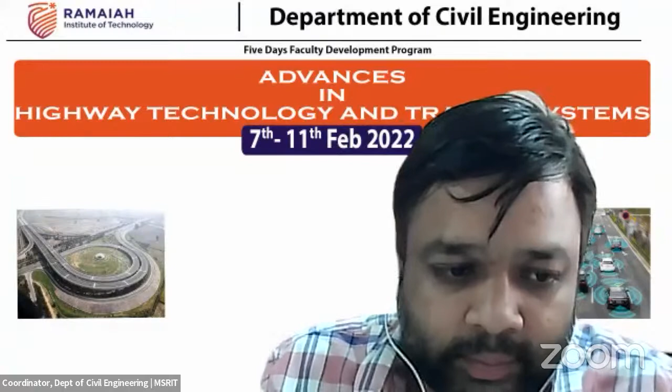Thanks, Charan. Thanks for that introduction. It was nice. I feel very proud to be an MSRIT guy. It's almost 13 years back. I studied and passed out in 2009. So it's been a long time since I've been in MSRIT. So yeah, thank you.

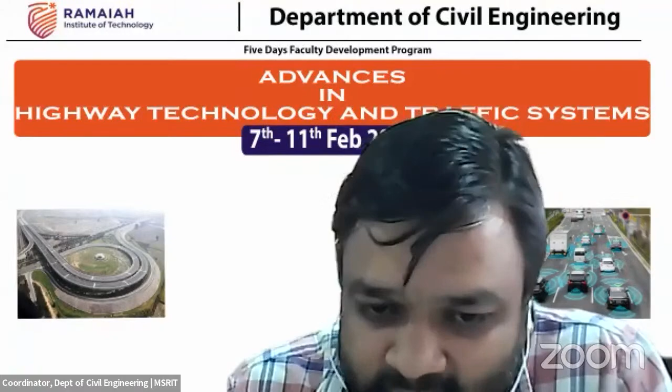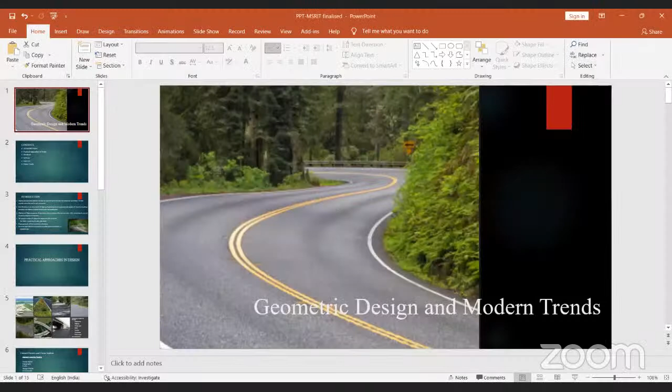So in today's topic, I'll be speaking about geometric design and the modern trends, what we are following and where we have to implement. I'll not be going into what is the transition formula or super elevation formula, because as students and lecturers, you would have learned them in your bachelor's or master's. Definitely, you'll be teaching them and learning them.

But I will be explaining the practical experience, what we have to do, what softwares we need to learn, what codes we have to refer. So you can tell the students who come out of colleges, and they can definitely face the interviews very well. So that's the main intention.

I'm also telling the future trends, what we have to foresee, what we are presently doing in current trends. These are the main points I'll be covering. So these are the contents for today's presentation: introduction, what is geometric design, practical approaches in that design, then the various standards. I'll be touching upon IRC standards because majority we are speaking about Indian companies. And other things like the various softwares.

Here I am giving emphasis on safety, because I saw there are other road safety topics in the upcoming sessions also, but what importance we have to give to safety is a major thing we have to consider. And the last, the future trends, that is most important. Nowadays the technology has grown in such a way that we have to be well versed and ready at this present stage.

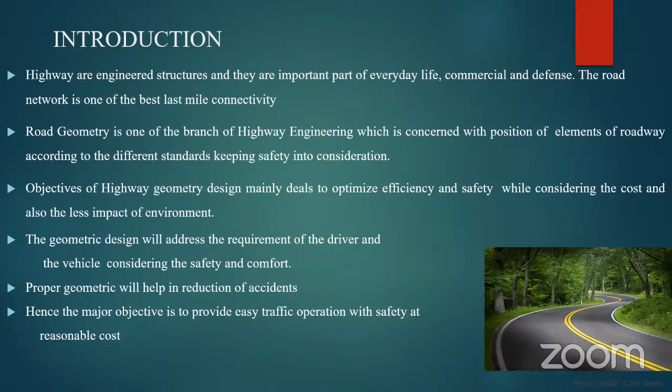If I am designing a 4-lane national highway, I'll understand, okay, this is my requirement. This is my design speed. It will have a median. What are the conditions I need to follow? So first, as an engineer, if you want to design any project, you should understand which project you're designing, because each and every road has its own standards.

So it's not that an expressway will follow the same design speed as an MDR. No, it's not like that. Each and every road has its own specifications. Each and every junction will have its own specifications. So first, as engineers, we should understand, okay, I'm designing a national highway, say a 4-lane or 6-lane national highway. What are its configurations?

Or if it's a 2-lane, what will be my lane width? And what is the median width? How should I approach near the structures? What should my slopes be? So that's what you should understand first, the classifications. If you refer to IRC, each and every road classification and its specifications are very clearly defined.

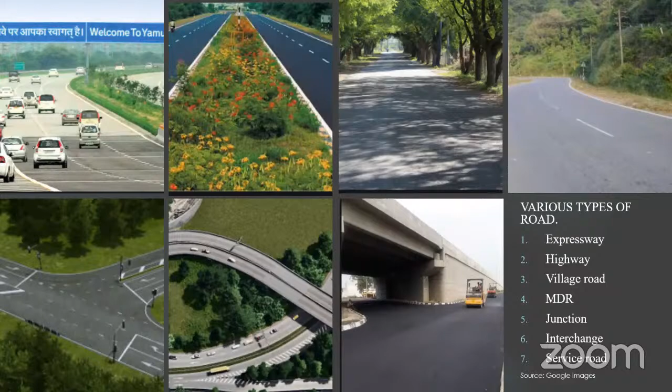So now the very important thing we should be understanding is the control factors. Design speed is one of the major control factors. If you see each and everything, your signboards, your curve design, super elevation design, everything is interlinked to this design speed. So your design speed plays a very important role in your geometric design.

So we learned about classifications. Okay, I'll be designing my 4-lane national highway. Now the control factor is your speed. I'll be designing for 100 kmph. That is your major control factor, because all your transition curve designs, which use the three formulas to calculate the maximum transition values, or the radius you're going to put, or the super elevation, everything is linked with the speed. So this is one of the major factors.

Now coming to topography. Topography, in local terms, is the ground condition. It can be a plain terrain or hilly terrain, because for a national highway, if it's a hilly terrain, I cannot design it for 100 kmph. So I should also understand my topography. If it's a plain terrain, what should I do? If it's a hilly terrain, how is my design speed interlinked? My design speed gradually reduces. How is my radius? So that is very important.

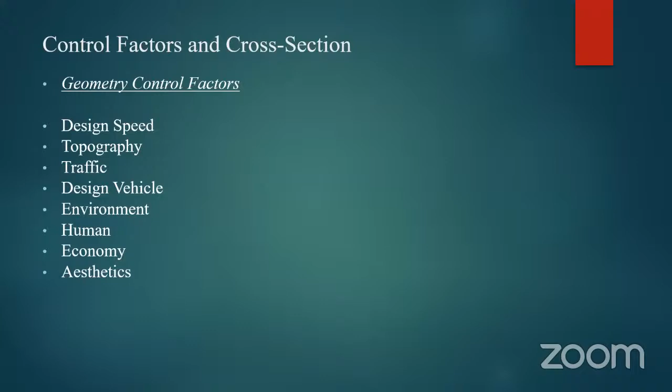And aesthetics. Aesthetics is the least thing we give weight to, but nowadays the trend is that we have to design roads which look very beautiful, with beautiful surroundings. If you see some streets in foreign countries, they look beautiful running between the buildings. Aesthetics is also given importance nowadays.

So I know my clear carriageway width is 11 meters. There is a crash barrier, a footpath, then a service road and drain. So within my right of way, I have to design this completely: my service road, my footpath, drain, and my carriageway, which should also have a footpath in the bridge location.

So my right of way is only 40 meters. Generally for a 4-lane, they'll give us a right of way of 40 meters. Within these 40 meters, I have to fit this entire component. If you take it as 16 meters, your 5.5, it's almost 11, 26, 27 meters plus 2 to 4, it's almost 30, 31 meters, plus extra side slope of 2.5. So you'll understand that within 40 meters, I have to fit these components.

So now you know my classifications, my control factors, and now I know the cross sections. Knowing all these components, each and everything, then we can go and start your designs.

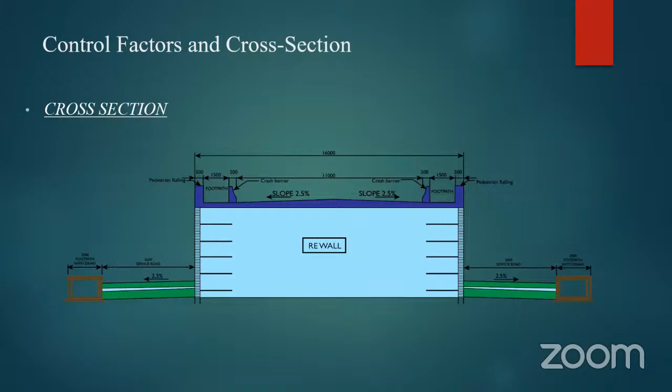So as I was mentioning earlier, alignment design is basically bifurcated into two types, horizontal design and vertical design. Horizontal design is basically made up of a tangent, a transition curve, a circular curve, then again a transition curve, and again coming back to tangent.

If a curve is designed with more than 1850 meter radius, there will not be a transition, because you don't need to provide any superelevation. The normal camber that is provided will take care of the superelevation effect. So I will not be going into the various types. There are 5 types of sight distances. You'll definitely be learning what is the stopping sight distance, intermediate sight distance, overtaking sight distance, headlight sight distance, and intersection sight distance.

So practically, why am I telling you about sight distances? Now I'm designing my 4-lane divided carriageway. I will not be concentrating on my overtaking sight distance, because overtaking sight distance will not come into picture if I'm designing a 4-lane divided carriageway, because your traffic has been bifurcated by a median. So as an engineer, we should not think, whether I designed the alignment, I have to check with OSD. No, if I design it with my ISD or SSD conditions, that is more than enough. That's how we make the job very simple.

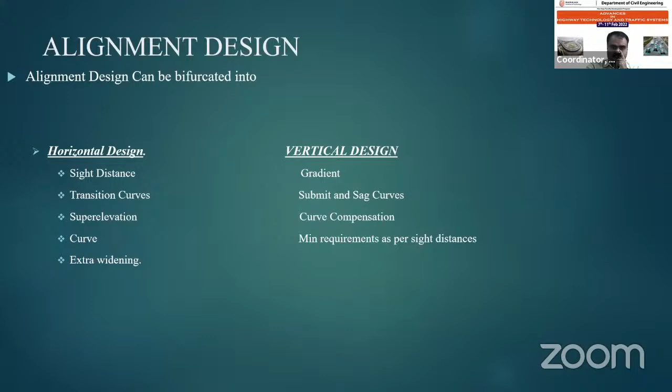So these are the various standards I want to emphasize when you're learning geometric design, because this is very important nowadays. It gives you the theoretical subject and it gives you practical experience also. And what are the minimum values we have to follow?

So if you refer IRC 38, guidelines for the design of horizontal curves for highways and design tables, it covers all types of roads, starting from service roads to national highways. It speaks about each and every topic: setbacks, transition curve values, super elevation values, each and every value for each and every speed, each and every terrain condition.

Along with Khanna and Justo or whatever textbooks you're referring, also refer this one particular code, which is open source. If you type IRC 38 in Google, you'll definitely get it. So along with the textbook, say for horizontal design, refer this particular code also. Then it will give you a complete picture.

See how practical an approach they have given with the diagrams, how the curve is drawn, what is the mid ordinate, what are the components of the curves, everything is defined there. The same transition formulas written in the textbook are written here also, but how to implement them and where to implement them.

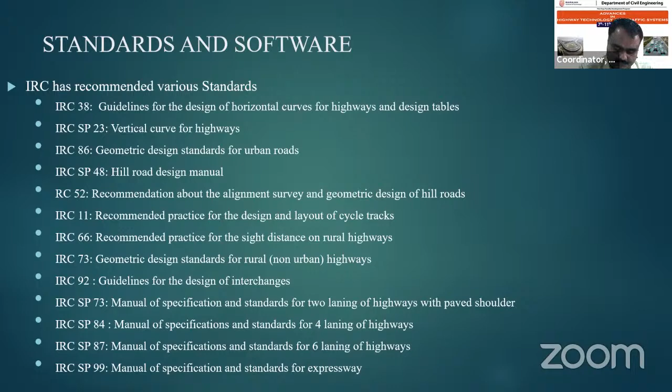If somebody is designing, you have to write, okay, IRC 37 for flexible, IRC 58, that's fine. But SP84 also sets some standards. This is the minimum thing we have to follow. This is the minimum MSA you have to follow. So that's where you'll be learning all the practical points of it.

So now coming to the software, this is how we are presently working. We are sitting in our office, we are sitting at home and delivering projects outside, thanks to technology. There are various software I'll definitely tell the teachers and also the students about. Nowadays, MX Road, I think, if somebody wants to learn anything, MX Road is an outdated one now. Please don't study that one.

Now go to OpenRoads. OpenRoads is an updated version of MX Road. So please, if somebody wants to learn any software, any highway technology, go for OpenRoads. MX Road is already outdated and basically nobody is using it. OpenRoads and Civil 3D are the two major software being utilized in the industry right now.

I can say the majority throughout the world. There are 1 or 2 countries where they have their own software, like in Australia they use 12d software. But in India or anywhere, UK or America, on the Western side, Civil 3D and OpenRoads are the two major software they are utilizing for design.

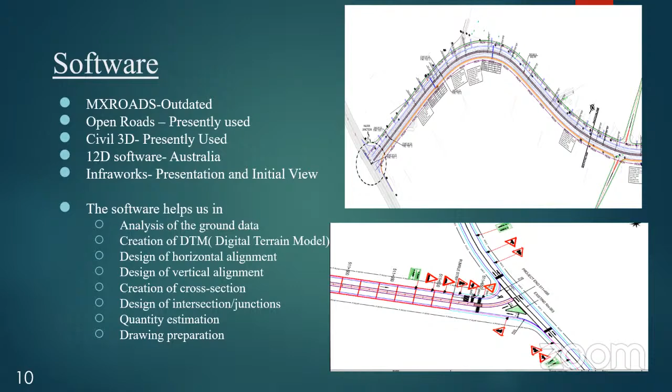So nowadays, any of the roads are open to public after safety audit only. Earlier, say 5-10 years back, if you designed the road, it got approved. But nowadays, mandatorily, MoRTH or the National Highways has specified that safety is a priority and it has to be audited. That means each and every design is being checked with the constructed one.

So safety audit will be happening during the day and also during the night, that means during headlight view conditions also. So both during day and night, a safety audit person will check, give comments, and then finally approve that it can be open to traffic. Until then, none of the roads will get open to traffic, even if it's been completed; until its audit is done, it will not be open.

So why am I bringing safety into the picture? Because it's of high priority nowadays. Accidents have been happening, and we have to reduce them. How do you showcase yourself? By designing a beautiful road which is comfortable and accident-free. Safety should always be your priority. Authorities, IRC and all other standards are meant to be followed to ensure our designs are of highest quality and safe to the road users.

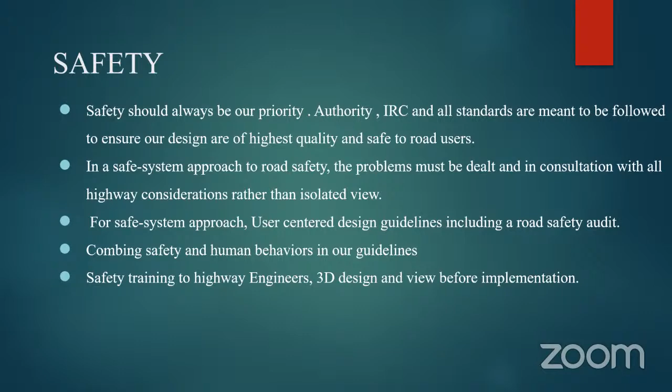Nowadays, in any of the high-end cars, you can see a 3D view of the road ahead. It will give you the approach. 3D views are getting into your car itself nowadays. So now we also have to give safety training to highway engineers. We have to do 3D designs, like modeling, and view them before implementation. This is very, very important nowadays. So this is what I would like to speak about much more here, because these are the future trends, and this is the younger generation that is coming out.

We have to design and should focus on future-ready designs. See, future ready means now you are in 2022, but your roads are designed for 15 years, 30 years when you're designing. We have to think that so many vehicle modifications will happen, land use patterns will change, environmental conditions and factors will come into the picture. So you have to keep in mind that you design your roads in such a way that they are future ready.

So nowadays, I can say each and every drawing is gone now. All the plan views on paper are gone nowadays. Each and every one is designing in 3D view. You sit in the office, you sit anywhere in the world, you can see your designs. Visualization: you can put the vehicles in motion. You can put the street lights. You can see whether the largest vehicle is able to take the curve, whether any accidents will happen, whether it's overrunning or whether it's hitting any of the medians or curbs.

So this 3D visualization is one of the ongoing trends, and definitely it will run, and moreover 4D and 5D are coming in. So this is very, very important. Also, now gone are the days... these are the future trends that are coming up. So this is very, very important.

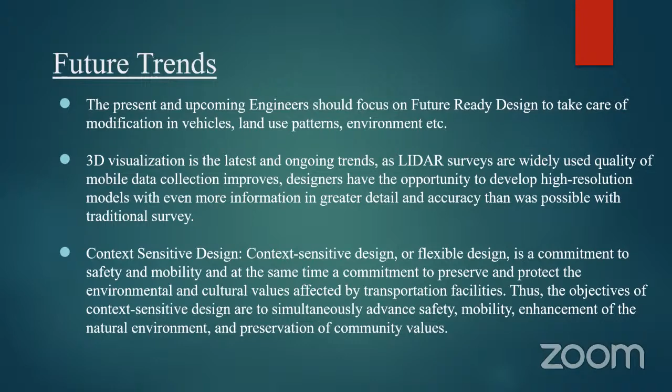Because nowadays, if you see any budget that is given, carbon footprints, you have to reduce them. Carbon footprint is basically your carbon dioxide. You design for your environment; say, use of fly ash in your pavement design is one way of reducing the carbon footprint. Now more importance is given to cycles, footpaths, pedestrians walking. So this is how more importance has been given.

The Interactive Highway Safety Design Model. This is basically a computer-based tool that facilitates the evaluation of safety implications in design through each and every step, from your planning till the execution. Safety has been given the highest priority. And now ITS technology, this is way more trending. I think this is also becoming one of the disciplines in many organizations. This is basically a technology.

I was reading an article today on LinkedIn. If you just throw anything, like say you have a Domino's or something and you just throw the paper, the system will detect your license plate number and it will send a fine to your home. That's how the technology has been growing. So similarly, in geometric design also, they are bringing it. Several ITS technologies have the potential to significantly affect geometric design, because it's not the normal trend that we are following. Nowadays, high technology, use of headlights, automatic braking systems.

If you have seen Volvo, even in a small vehicle, automatic brake applications are there. If you see Tesla, automatic self-driving without a driver is going on. So you have to design accordingly; see, normal sight distance when you calculate it, minimum stopping sight distance is 180 meters. Now driverless cars are coming. So human behavior goes out of the picture.

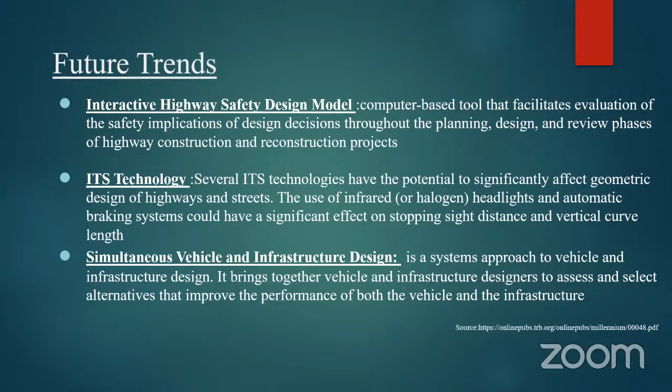Then special use highways. This may be very difficult, but special use highways and transportation not available to the general public, for example, bus and HOV lanes. That means this is only meant for the bus lane. In Bangalore they did it for the outer ring road, but it failed. So this is something which we need to make work. Going forward, definitely it will be one of the priorities. For heavy vehicles, we should design separate lanes so that congestion is avoided.

Then vehicle to infrastructure and vehicle to vehicle communications. With the technology, a message will automatically be displayed on your screens in the future: there is a snowfall ahead, the temperature is this much, there is a traffic block there. So definitely all this will have an influence on geometric design decisions. So these are the trends that we should follow, and ensure that we also adopt the technology and design accordingly.

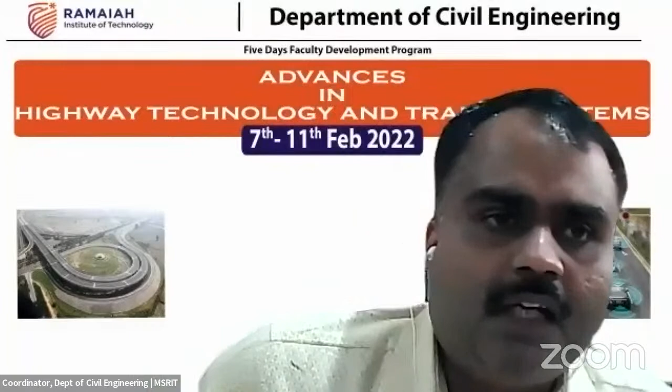So with that, we have come to the end of our third day sessions. Today we had 3 sessions. First by Dr. Partha Pratim Dey, mainly on medians. Sir talked about various theoretical and practical aspects of median openings, and his session was very informative and threw light on new areas of research in traffic engineering.

The second session was by Dr. Nisar Ahmed, our own faculty, who has very wide experience in surveying, not only in India but in foreign countries also. Sir briefly explained the advanced techniques, starting with aerial survey to LiDAR survey. He also covered some of the work he has done in Saudi Arabia. It was very useful and informative.

The third was just concluded by Mr. Arun N S. He gave an in-depth presentation on the basics of geometric design with various software commonly used in the field and abroad also. The future trends in geometric design, like the interactive highway safety design model, simultaneous vehicle and infrastructure design, etc., were discussed in detail. We hope these 3 sessions were very useful to you.